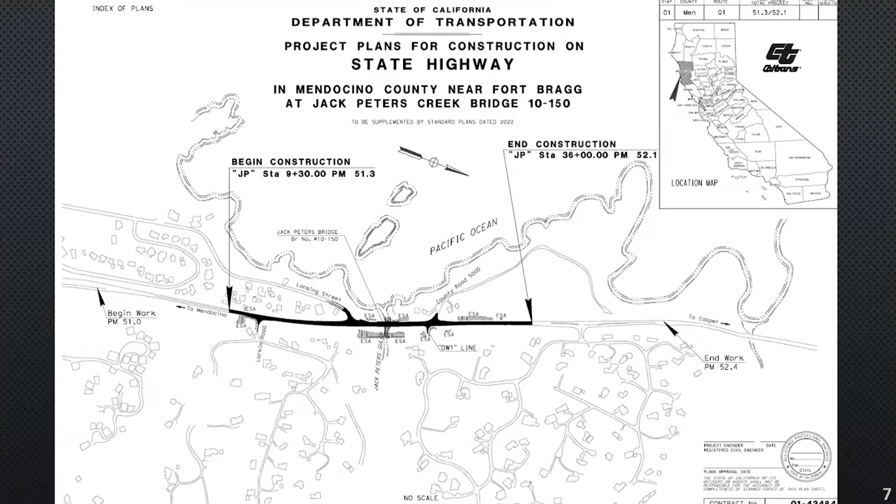The Jack Peters Creek Bridge was built in 1938. Existing shoulders are approximately 1 foot wide. Pedestrians and cyclists must share the lane with vehicles. The railing is too low for pedestrians and bicyclists. The existing bridge rail does not meet our current crash testing standards, and there have been numerous advances in safety standards since this bridge was constructed to improve both performance and safety for the traveling public.

Caltrans' highest priority is safety, and Caltrans aims to eliminate fatalities and serious injuries by taking a realistic and holistic view of safety for all road users, including those who walk, bike, drive, ride transit, or travel by other modes. This project proposes to make safety improvements to State Route 1, which is part of the designated Pacific Coast Bike Route and the California Coastal Trail.

Proposed safety improvements include widening the bridge for a 6-foot separated pedestrian walkway along the west side of the bridge, adding 6-foot shoulders to provide a designated space for cyclists and a recoverable area for vehicles. See-through barrier rails that meet current safety standards would be installed.

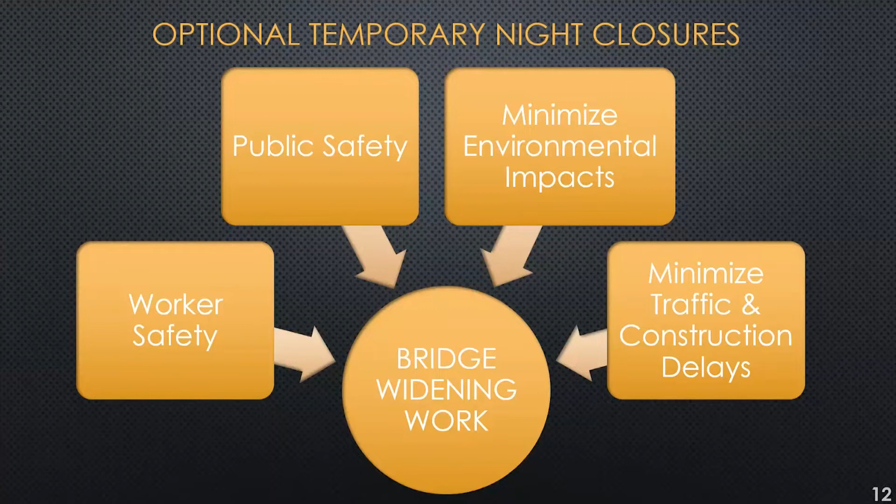We would work with emergency services to develop a plan and notification system to minimize delays. We want to ensure the contractor and emergency services are prepared to respond to incidents without delays. The contractor would be required to prepare an emergency response access plan and contingency plan. These plans would require the contractor to coordinate with local emergency service agencies for advanced incident notification, and to have procedures in place to clear the lane and allow emergency services to pass through the project quickly and safely.

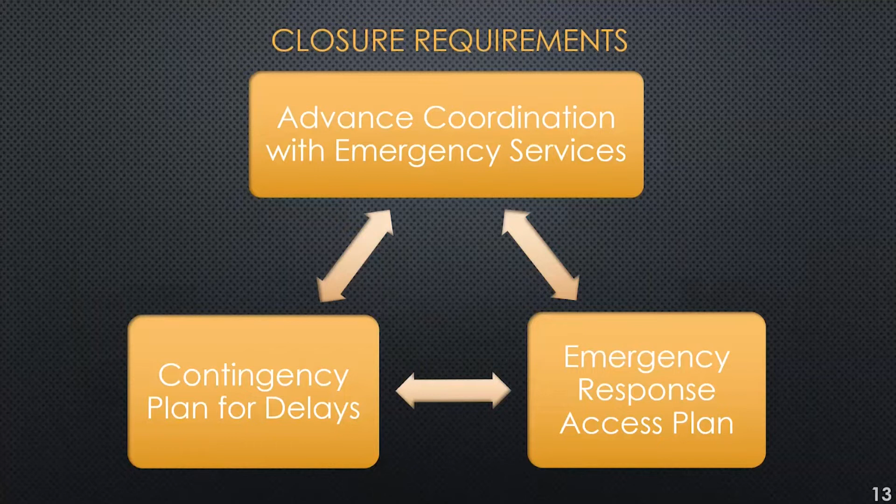If full night closures are allowed, we are anticipating the closures would occur in the summer of 2024. We would expect a maximum of 31 full closures, with closures occurring up to 5 consecutive nights. Closures would be allowed from 10 p.m. to 6 a.m., Sunday night through Friday morning, and holidays would be excluded from night closures.

If the contractor performs work at night, the following measures would be implemented. Noise from activities would not exceed 86 decibels 50 feet from the job site from 9 p.m. to 6 a.m. Lighting is mandated by Cal OSHA for worker safety, and lighting would be directed at the work activities.

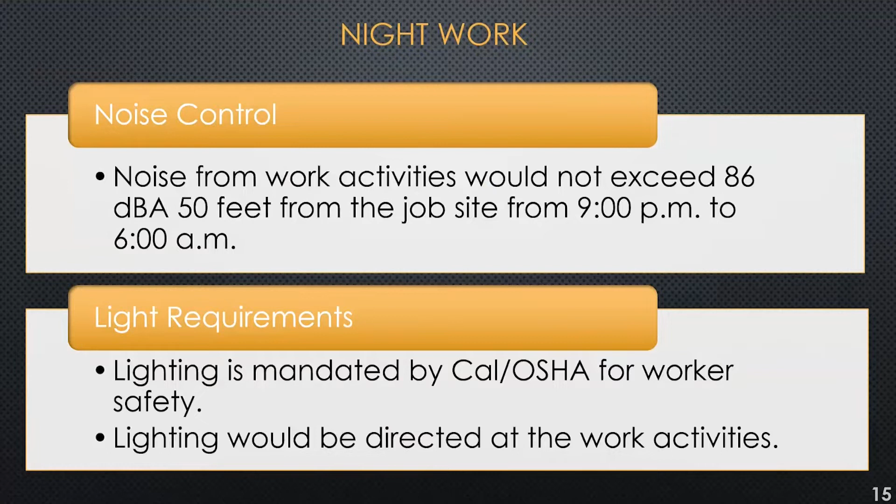Now I'd like to discuss the project schedule, starting with an update on the environmental permit. All permit applications have been submitted. We are currently coordinating with the agencies to ensure all applications are deemed complete. We expect to have all permits issued by January 2023, and Lorna will follow up in this presentation with discussion on the coastal permit.

The project delivery schedule: the plans have been submitted for the district safety review and constructability review. We expect the project to advertise in April of 2023. Vegetation clearing would begin in the fall of 2023, and construction is expected to start in spring of 2024 and continue until fall of 2025.

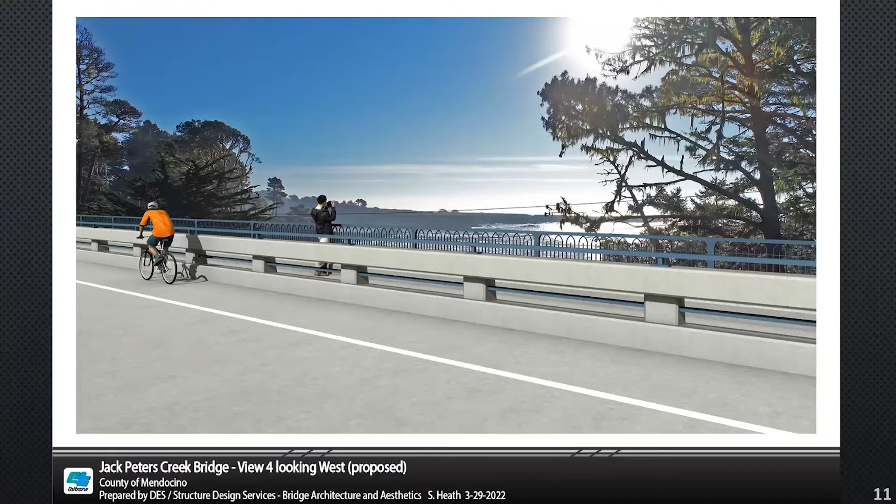So Karen, this is Jeff Wright, to try to help you in a response a little bit. Again, I'm the area construction engineer for Mendocino County with Caltrans. The majority of Route 1 has essentially no shoulder for its existence through Mendocino County. So from my opinion, I think we're making a vast improvement here by adding a 6-foot shoulder. The Mendocino County coastal concept for this route only allows 4-foot shoulders when any improvements are made anywhere else, so we're making a larger shoulder than what the coastal concept report really allows.

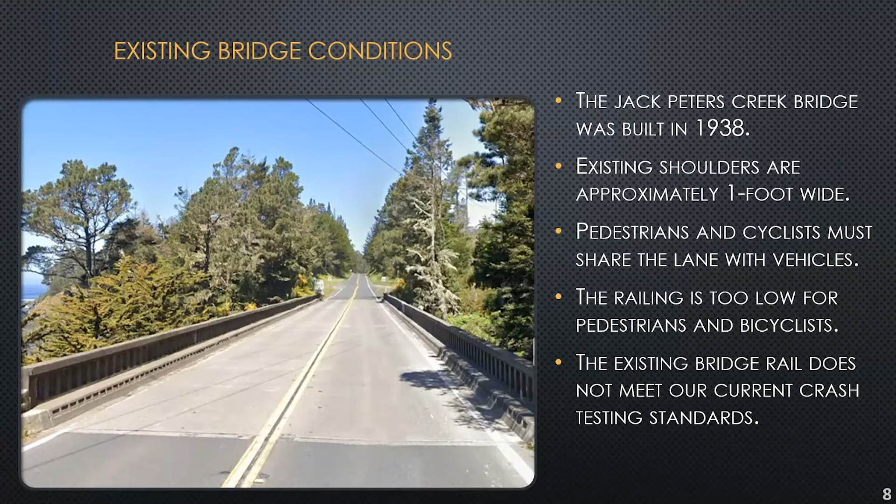So I think we're making a vast improvement over what is there. I hear Mark's concern, and I know he may have a desire for a separate, protected bicycle route, but I'm not sure we have the ability budget-wise, and as Karen said, it would make the bridge a lot wider. Maybe there's room for discussion about allowing bicyclists to ride through the pedestrian pathway or something. I'm not sure, that's really beyond my wheelhouse, but for what it's worth, I think we're making a vast improvement over most of Route 1, and I think this is a great iterative improvement myself.

Thank you, Jeff. Mark, are there any other thoughts or comments? We can move to the next question. It still seems inadequate, but okay, I'll provide some written comment. Absolutely, thank you so much for your question and comments, Mark.

Manny, who's next? Yeah, our next question comes from Anne Marie. Good evening, can you hear me? Yes, we can. Oh, okay.

Lots of questions. Why were only 20 people notified when we don't even know where the project starts and ends? And also, there are other areas where equipment will be stored and people will be driving back and forward, so it affects a huge community.

We weren't told about the Sanders Landing offsite habitat mitigation. The LCP requires a 100-foot buffer, but there's only 5 feet available next to the bridge. The biological resources mitigation is not sufficient. Where's the compensatory visual mitigation report for this project?

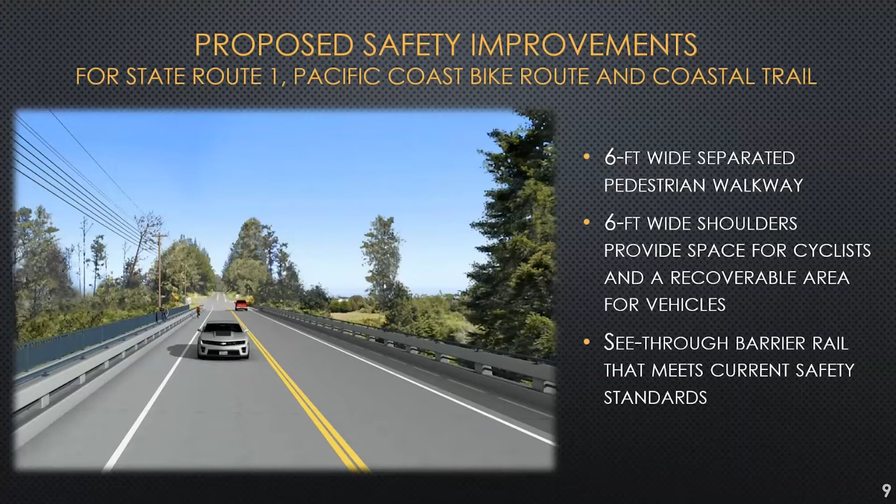Noyo Bridge used the railing, and also 10 Mile Bridge, and I ask you to look into that. The Coastal Commission did. We're not happy with the Midwest Guardrail System. This project is not subordinate to the character of the setting as required by the Coastal Act. Do not use decorative pedestrian railing painted blue, and have context sensitivity with tribal patterns.

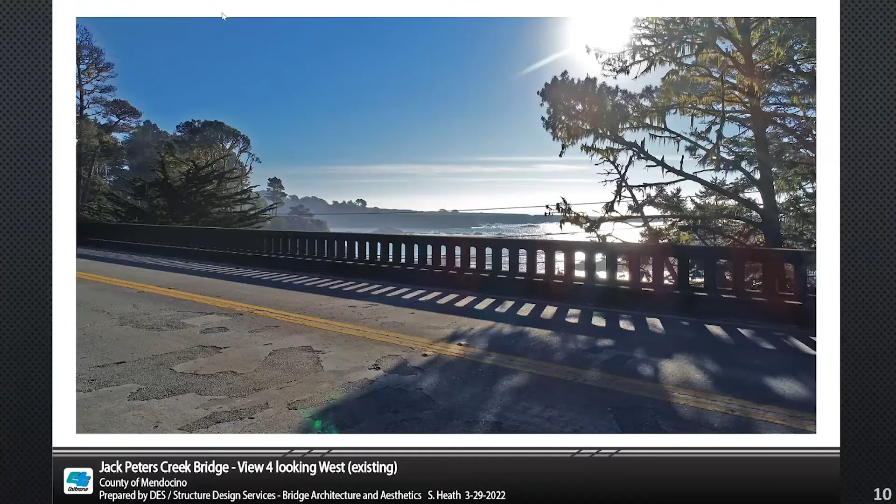And when we leave Surfwood Estates, I'm a little concerned about being able to get out on Highway 1. I'm wondering if there will be anybody directing traffic for us during high traffic times so that we'll be able to turn left or right out of our neighborhood. That's one of my questions. Let's start with that, please.

Caren, or maybe Jeff would be the best person for that. What do you think? I can touch on it briefly, and then I would hand it over maybe to traffic ops. We are expecting to have a temporary signal system in place, so access out of the side roads would always be available. When there is a flagger, I would expect the flagger to be flagging the intersections. I see Jayne, I don't know if Sherry, but if somebody from traffic ops would like to speak on this, that would be really great.

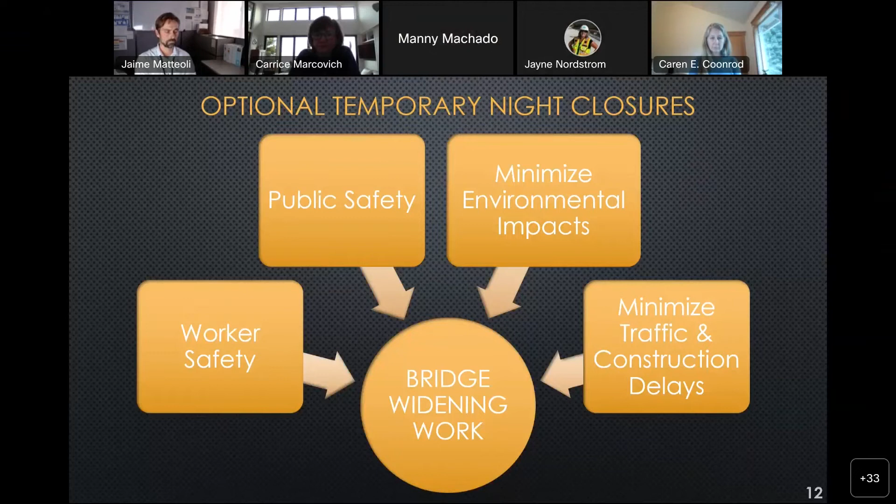Hi, this is Jayne Nordstrom with Traffic Operations. So we have designed the project. We expect the contractor to maintain that access to any side roads that might be within the temporary signal system. And then if they are controlling the traffic by flagging, or you have a stop flagger, then depending on where they place the stop flagger, they may have a flagger at one of your side streets. It depends on how long they make that closure for the type of work that they're doing. So it could vary.

But I think the key here is that we will maintain access to any side roads so that you can get out to Highway 1. Well, I would assume that we'd be able to get out. It's just a matter of how long before we can get out, how long we'll be sitting there waiting for that one-way traffic to go by. So I hope you look more into that for our community.

You talk a lot about safety. I'd like to talk a little bit about pedestrian safety. I was very excited several years ago when I learned you were going to build a pedestrian access portion of this bridge. But I'm not excited anymore because I realize once I step off of that bridge, I can't go anywhere. You can't walk down Lansing Street. You take your life in your hands if you walk down Lansing Street to try to get to town. There's no safe access. So if you talk about safety, that's a big issue for us.

It's also not safe to walk down Highway 1. And I realize you don't have any purview over Lansing Street, but I'm wondering, do you have purview over Highway 1? And could you improve the pedestrian access from the pedestrian bridge to the light in Mendocino so that we can use the pedestrian bridge to get to town? I mean, that's the whole purpose of a bridge, is to be able to cross over and go somewhere, have better access for the communities. And right now, this doesn't provide that.